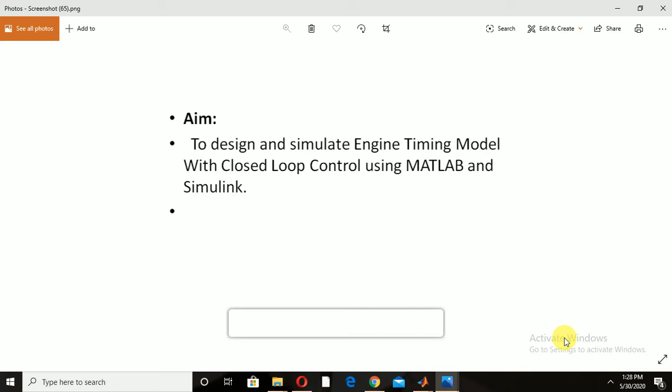We choose a control law which uses proportional plus integral control. The integrator is needed to adjust the steady state throttle as the operating point changes, and the proportional term compensates for phase lag introduced by the integrator. Here we are using a closed loop model.

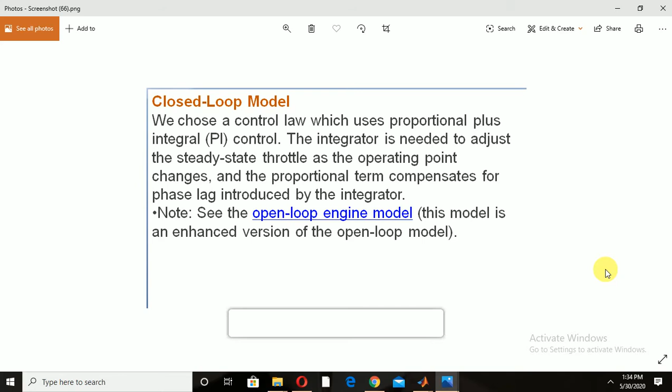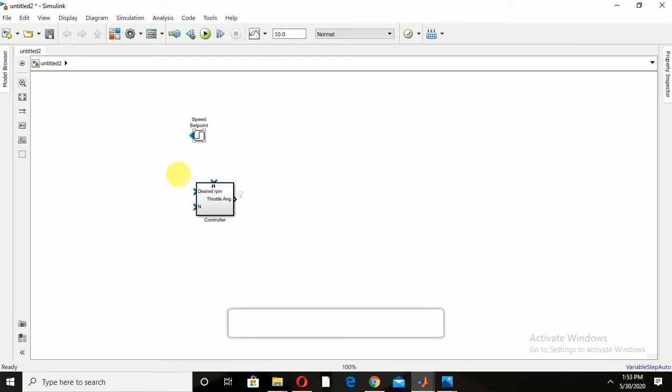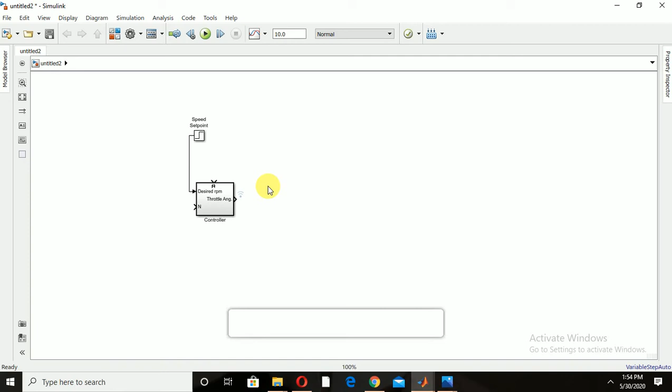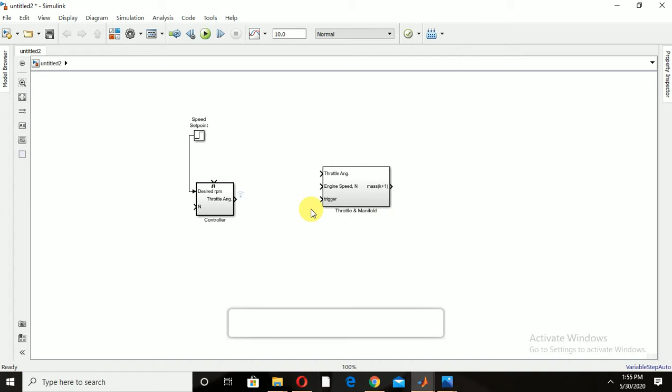Here is the controller, having desired RPM and speed as inputs, and output as throttle angle. I'm going to connect the speed set point to the desired RPM. Here is the throttle manifold. The output of this throttle angle I'm going to give into this as input.

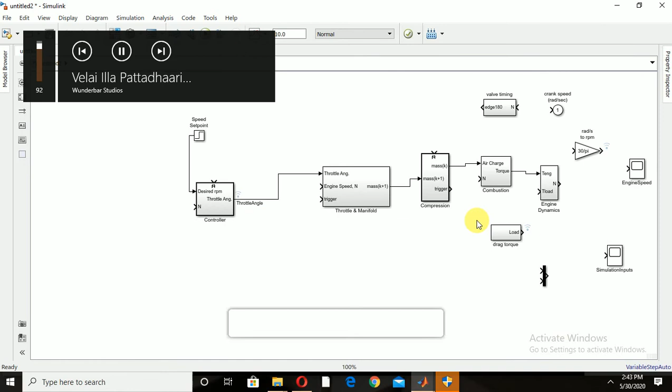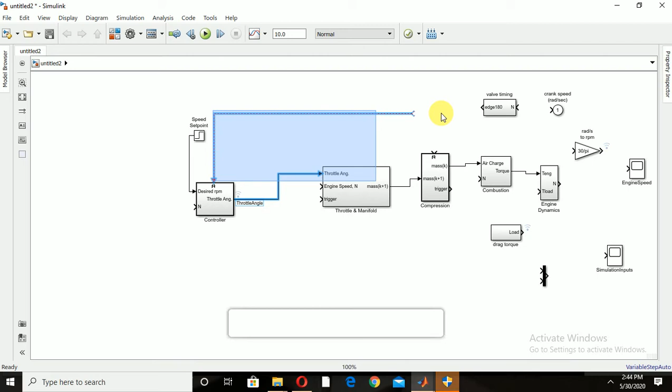And in this the engine speed is connected, the combustion speed is also connected, and it goes to the crank speed in radians per second, and the engine dynamics output is given to this, and the engine speed is given to the scope.

And here the combustion torque and the load torque are given to the engine dynamics, and the simulation output is the combination of throttle angle in the controller, and the load torque value given to the simulation inputs, and goes to the scope.

In this model, we employ a discrete time controller which is suitable for microprocessor implementation. The integral term in equation 1 must be realized with a discrete time approximation. As is typical in the industry, the controller execution is synchronized with the engine crankshaft rotation. The controller is embedded in a triggered subsystem that is triggered by the valve timing signal described above, and the detailed construction of the control

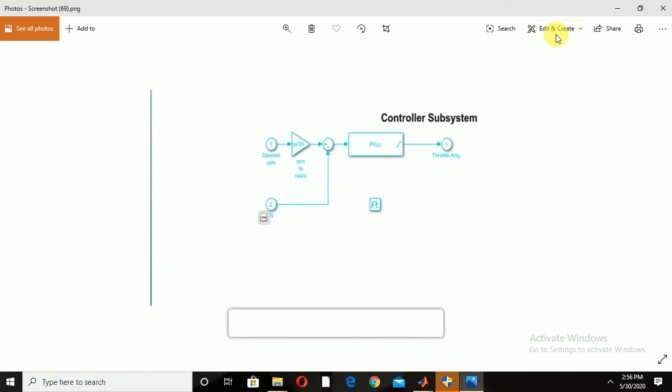Any subsystem can be converted to a triggered subsystem by dragging a copy of this block into the subsystem diagram from the Simulink connection library. Figure 2, which is shown on the screen, is the speed controller subsystem. Just run the Simulink.

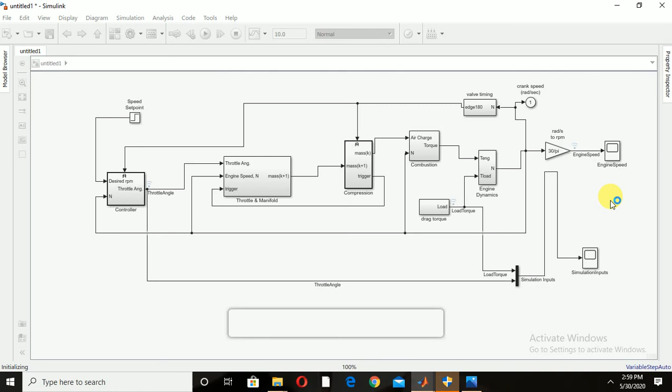It's compiling, and after completion of the compiling, just click the scope of the engine speed to see the engine timing model graph. Just click on the scope. Here is the output of the engine speed with respect to time.

Typical simulation results are shown in this screen. The speed set point steps from 2000 to 3000 rpm at t equal to 5 seconds. The torque disturbances are identical to those used, and just note the quick transient response with zero steady state error. Several alternative controller tunings Ki and Kp can be adjusted by the user.

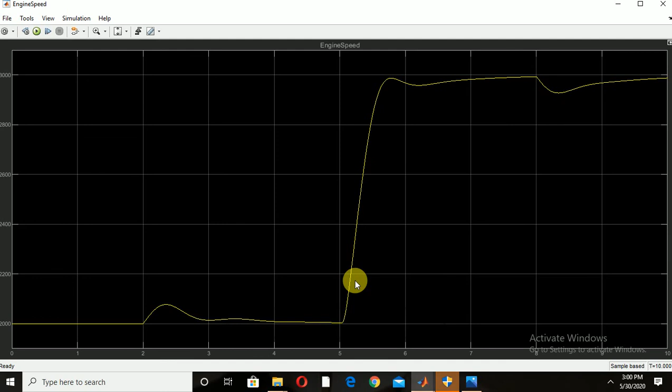And here are the values shown for Ki and Kp. You can also adjust the values of Ki and Kp, just in an Excel sheet.

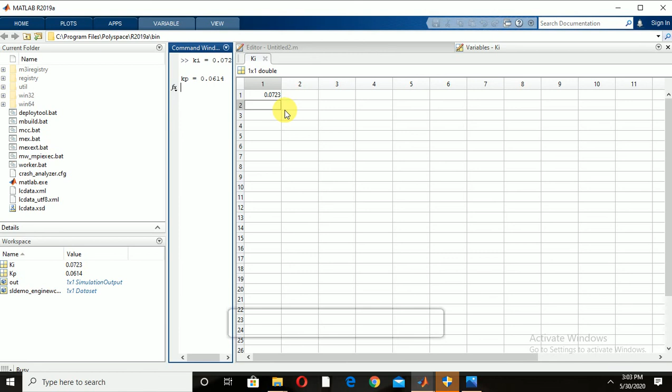In conclusion, the ability to model nonlinear complex systems such as the engine model described here is one of Simulink's key features. The power of the simulation is evident in the presentation of the models above. Simulink retains model fidelity, including precisely timed cylinder intake events, which is critical in creating a model of this type. The complete speed control system shows the flexibility of Simulink.

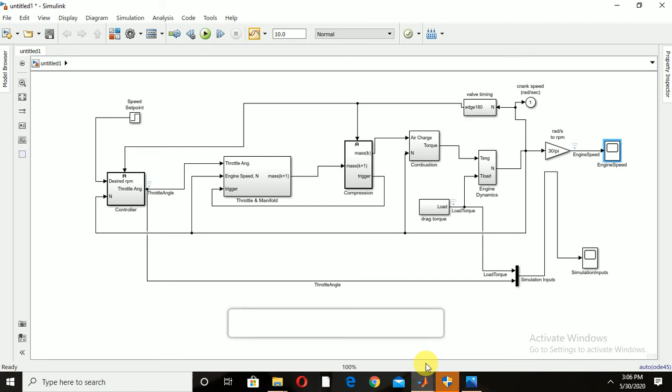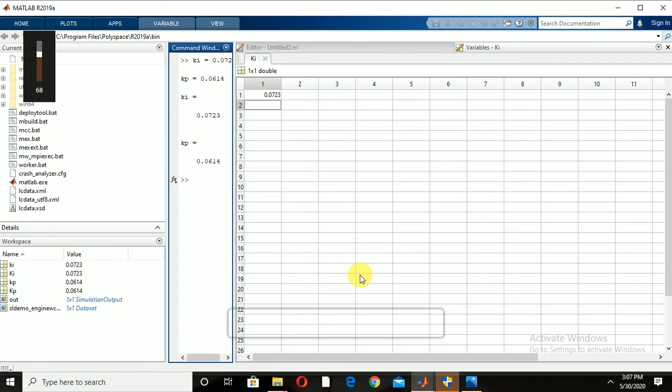In particular, the Simulink modeling approaches allow rapid prototyping of the interrupt-driven engine speed controller. Here is the closed-loop simulation result. The engine speed in RPM is on the y-axis, and the time in seconds on the x-axis. That's it.